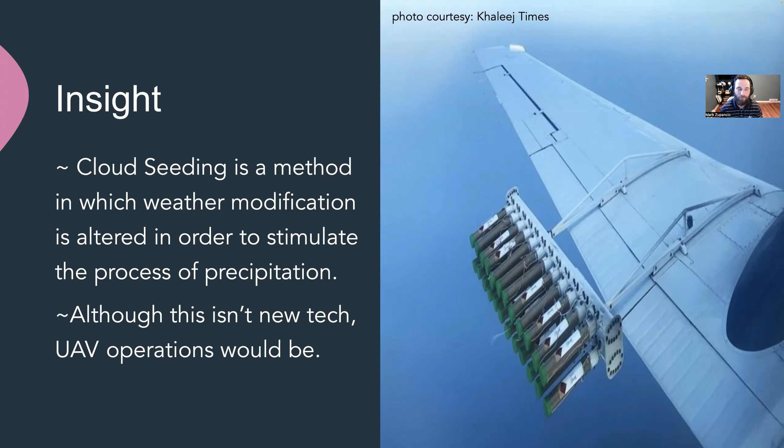Increasing weather instability has drastically reduced the water supply and forecasted weather in much of the United States and other regions. This erratic behavior will reduce growing seasons, complicate a variety of commercial services, and intensify wildfire scenarios. Global warming, along with erratic precipitation, poses a threat to agriculture, the environment, biomes, habitats, business, and human existence. The scale of detrimental disaster that this inhabits calls for a current solution to a global dilemma.

This leads into our problem context. Our proposed design focuses on addressing a solution where a swarm of drones will be dispatched to a problematic area. A respective sum of calculations will be formed by 3 different robots, utilizing a number of various sensors, gauges, and probes. An end result will be performed by a team swarm communicating with a central hub that results in the immediate and overall increase in precipitation.

Our customer base includes a variety of subcategories in the commercial and private sectors, ranging from local farming and agriculture, airports, ski resorts, and a number of various governing agencies, including the military. Our application area is mainly focused in these regions listed.

These are the design requirements as followed. Our swarm shall be designated into a cleared, required airspace. It shall be able to identify suitable weather systems in certain environments. The swarm shall be able to compute the necessary calculations in order to execute its mission. The drones shall finally be able to relocate to its designated landing zone.

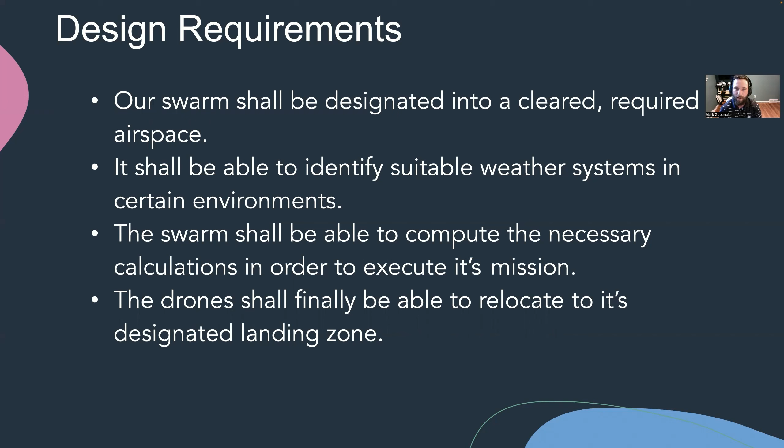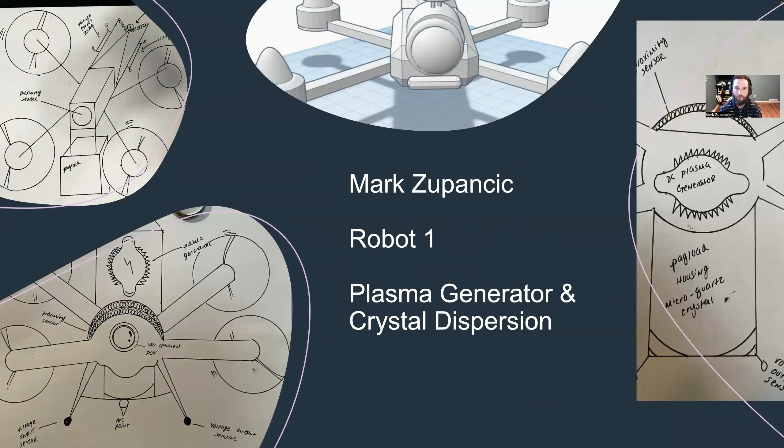My name is Mark Zupancic, and I will be presenting Robot 1, in charge of plasma and crystal dispersion. The first slide rendering the side angle of this CAD drawing features a sleek, aerodynamic, dual-body design of a quadcopter. On the anterior is where the logic is held, and the posterior is composed of the payload.

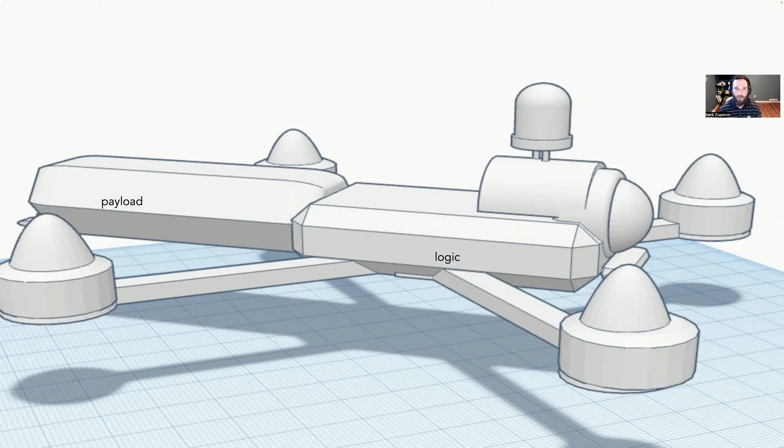The body composition will be designed using a carbon fiber shell, and the frame will be constructed from a titanium alloy. The next image shows an overhead view where the 4 DC motors are fixed to the frame.

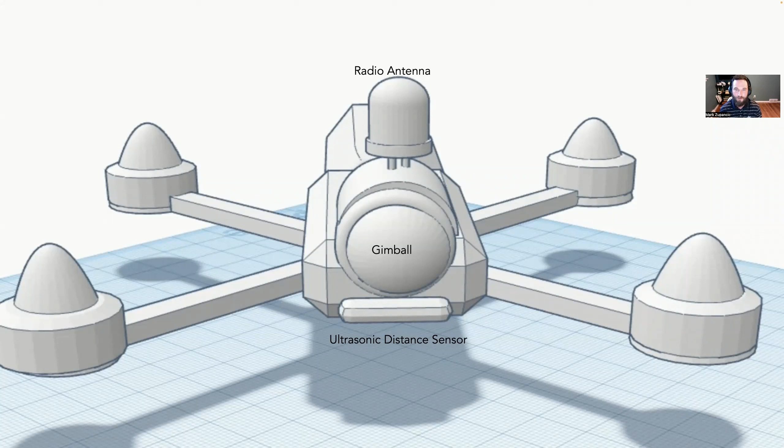Here, the ultrasonic distance sensor is located in the front for a 180-degree range of obstacle locations. A gimbal camera is also located here for usability. The dome on top is a radio antenna for unmanned control of this vehicle.

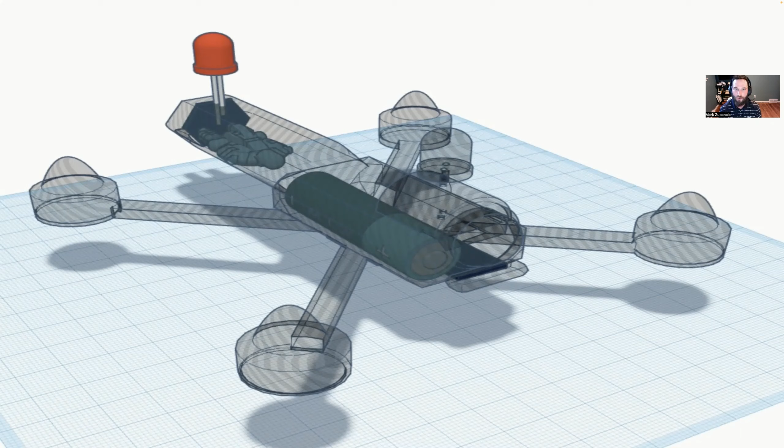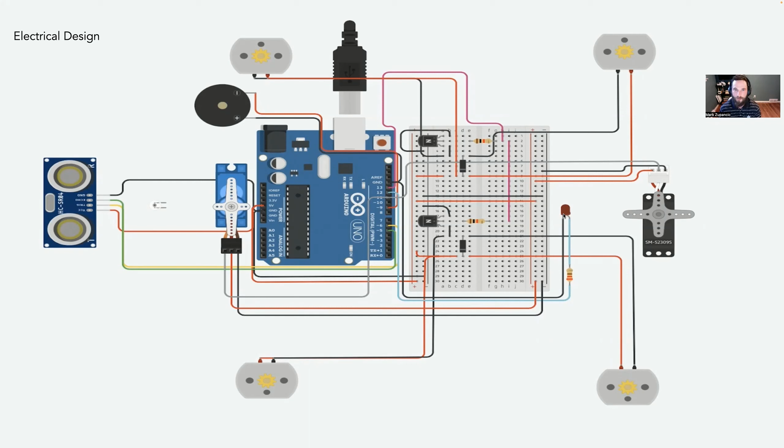As my flowchart provides in the next slide, once information is collected from the team swarm and hub, the unit powers on. I will run the simulation.

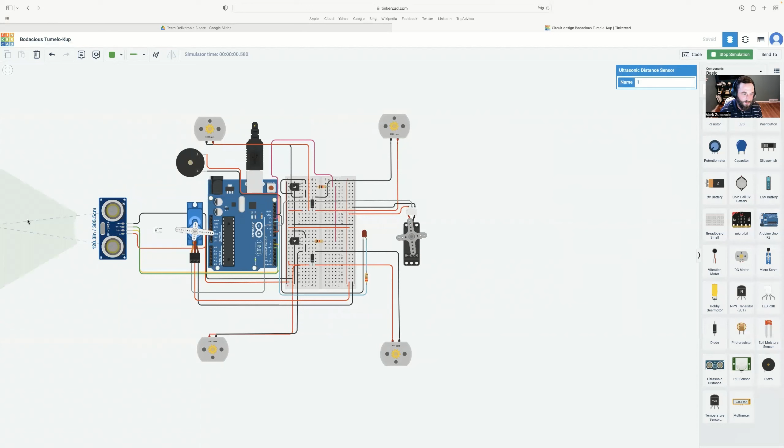I have my 4 DC motors here on the end. They'll be rotating at approximately 10,000 RPMs. My rear payload actuated door, in respect to my quadcopter, rotates from 0 to 180 degrees, kind of like a pepper grinder, so it will equally disperse its payload along a certain distance.

I have my LED here, which intermittently turns on and off to let air traffic control and other drones and planes know where I am, so they can visibly see me.

Here are the 2 NPN transistors. I have the 2 diodes, which will run the current one way - just all I need is to go up. I have my plasma generation right here. This will charge the particles released from the payload actuator.

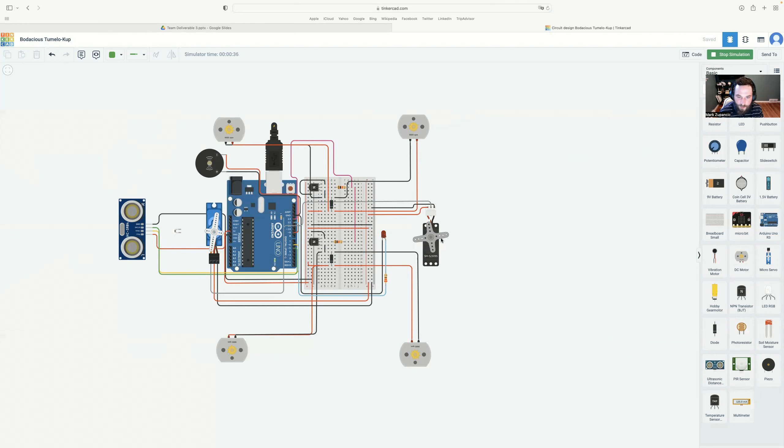Back here, and here's my software design listed. I will not go into much detail about that, but I will provide this at the end of the presentation. Thanks for watching.

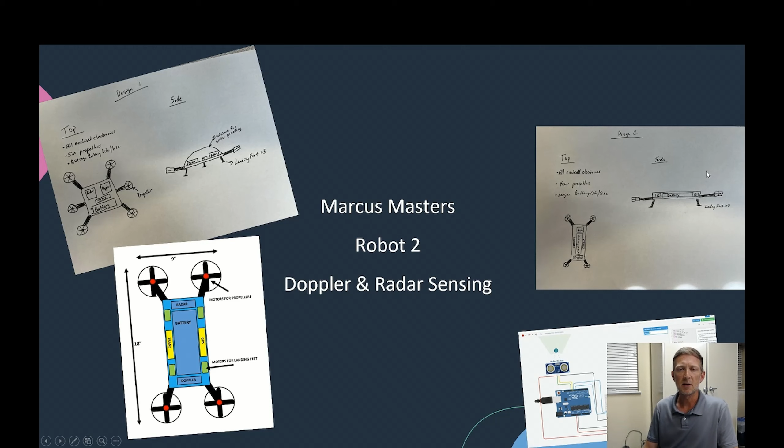My name is Marcus Masters, and I'm presenting the second robot in this group, the Doppler and radar sensing drone.

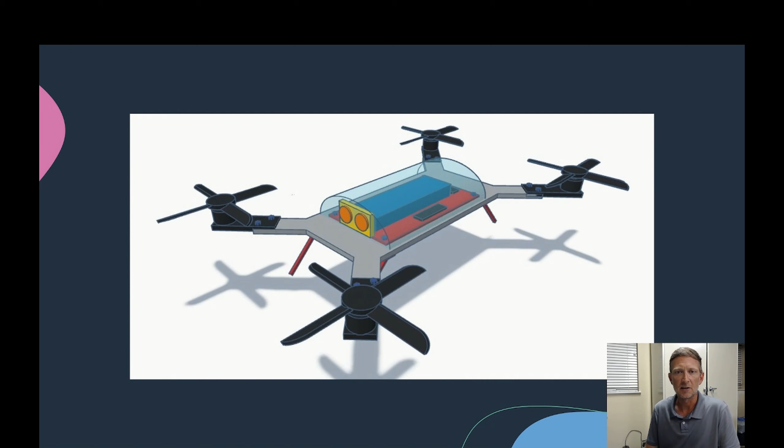Here's a broad overview of the drone itself. You can see that all electronics are enclosed to be protected from the weather and elements. The dimensions of my drone are 18 inches long by 12 inches wide.

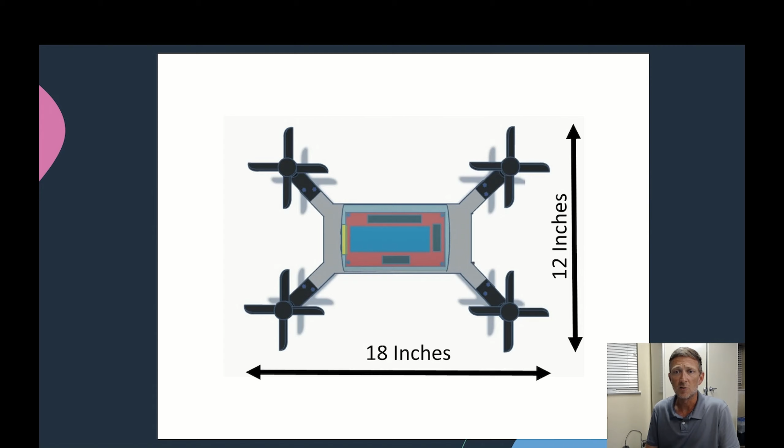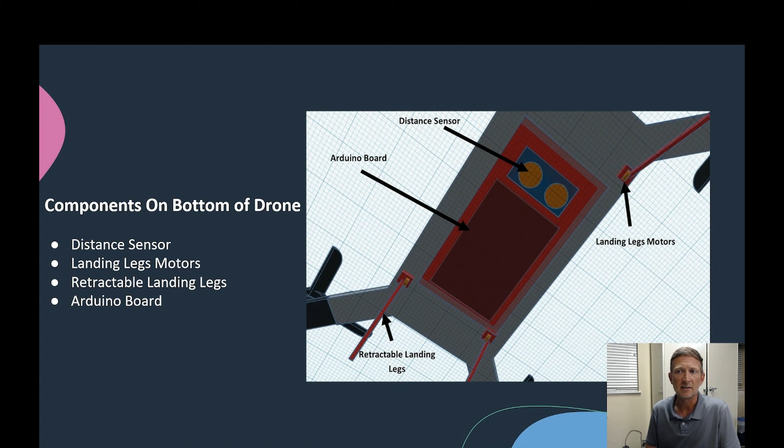The components on the bottom of the drone include the distance sensors, the Arduino board itself, retractable landing legs, and the motors that control the landing legs. The components on the top include the battery pack, communications boards, GPS board, the Doppler moisture sensor, and the ultrasonic distance sensor radar.

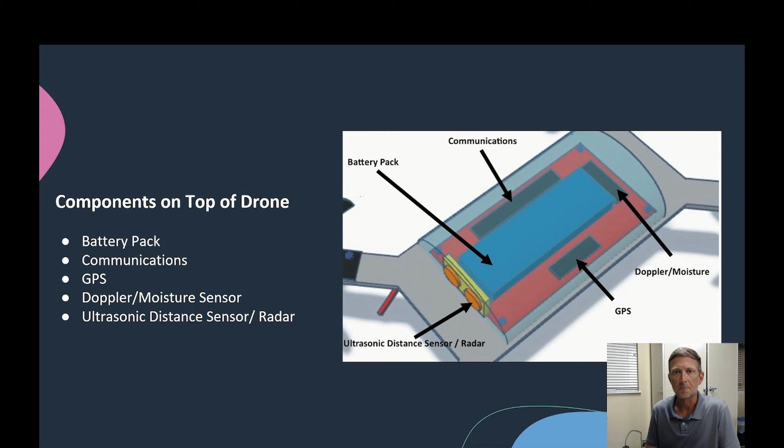If it fails that, it waits for a second, detects again. If it fails again, it communicates that back to the hub, and then the hub can decide if we need to pick a different area or what's going on.

If the radar does not detect any objects, it goes to the moisture sensor. If it has the desired levels, it will communicate to the hub and to the other drones to continue with the operation. Once the operation or objective is complete, the drone is programmed to maneuver back to the hub or home location.

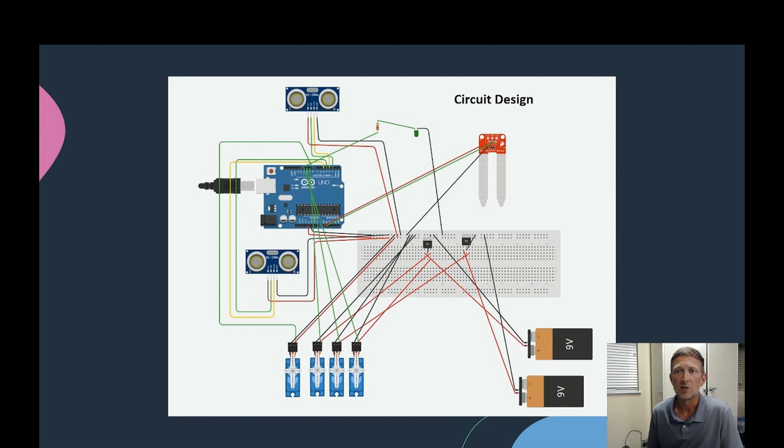The one on the bottom is for the servo motors. The one on the top detects if there is anything in the area. And then I also have a moisture sensor that once it hits certain levels of moisture will send a signal back that the levels are correct to proceed.

Here is some of the software coding that we have.

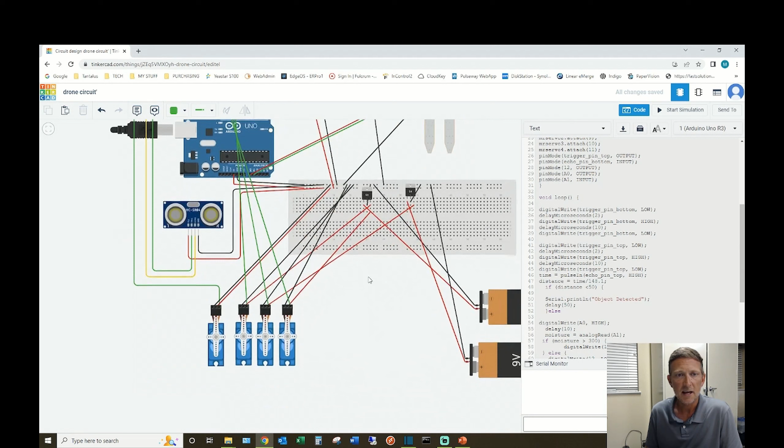Here is my design in Tinkercad. Start the simulation and we'll see that the servo motors are going to start moving - that's the legs retracting, based off this distance here, so it's far enough up in the air that the legs are going to retract.

This is the top sensor, and once this senses something in the area, it's going to report back to the main hub that an object has been detected. Get close enough - there we go, there's the report back to the main hub.

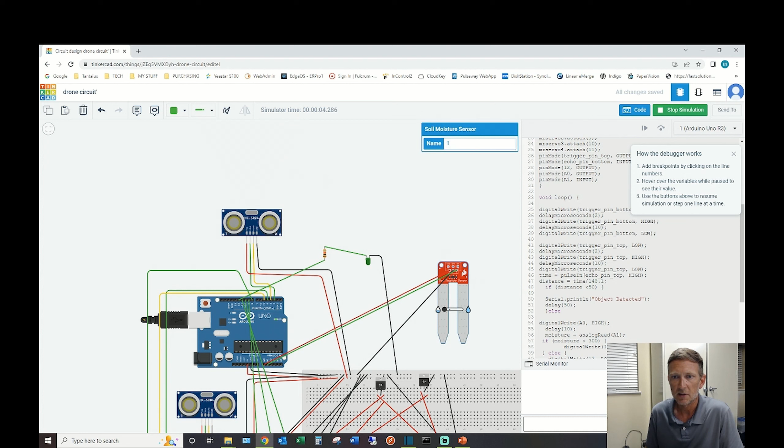Turn it back off. And then we also have the moisture sensor here. So once the levels of moisture get up high enough, and it reads that, it's going to make the green light go off, which is the message going back to the hub that the conditions are correct.

Up next is Jeffrey Hird, and he is doing the pressure and temperature robot.

Thanks, Mark and Marcus, for those great introductions and great slides representing your drones that will be part of our swarm team. I'm Jeff, part of Team 19 Gearheads, and I'll press on with cloud seeding based off of Mark and Marcus's great presentation. I'll jump right into it.

Here's my pressure and temperature sensing robot. There's the initial drawings sketched up and scanned in, and an example of how I hope my Arduino code would have turned out.

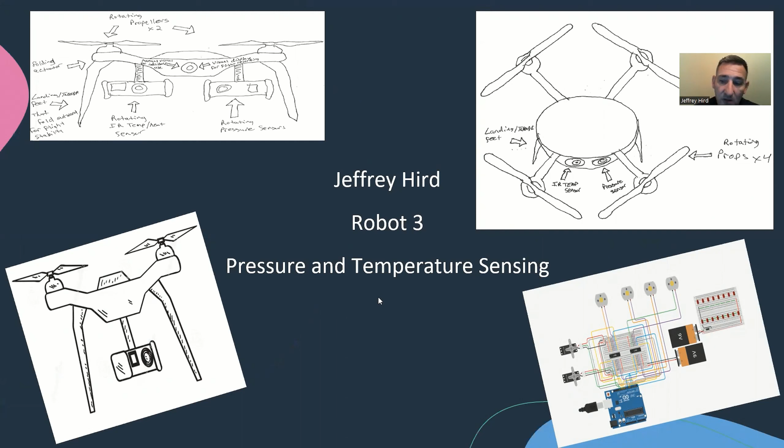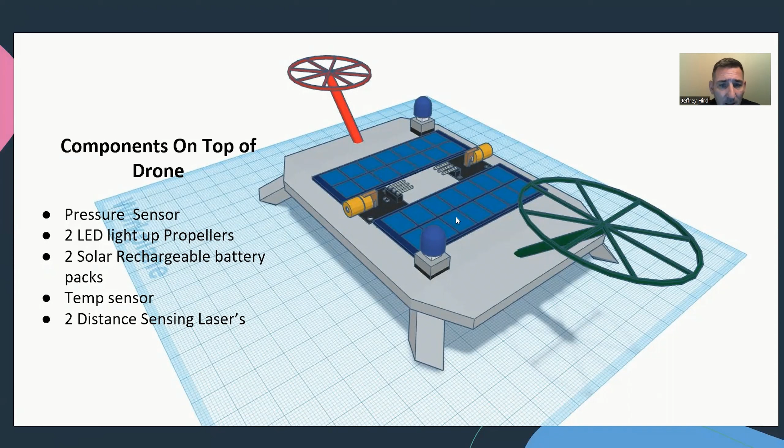So here's my design, basically shown on top here. The components are: I've got two propellers, one red and one green, kind of like lights on a fishing boat at night, so they light up in hours of darkness. I've got a couple solar powered rechargeable battery packs, and then my two sensors, one pressure and one temperature. I also added some distance sensing lasers so we don't run into anything or other drones while in the air.

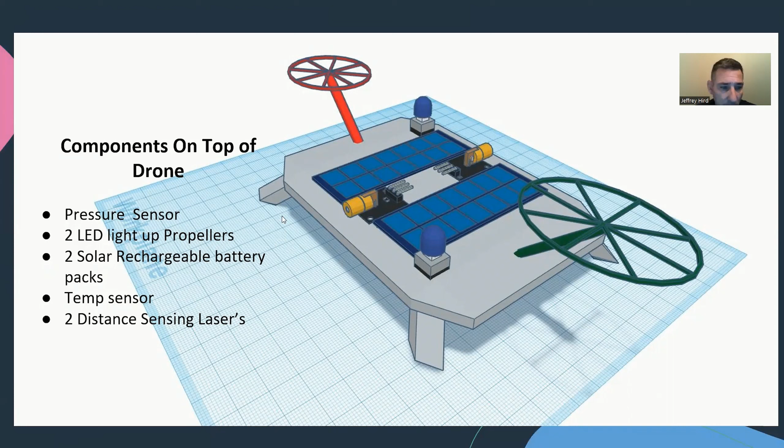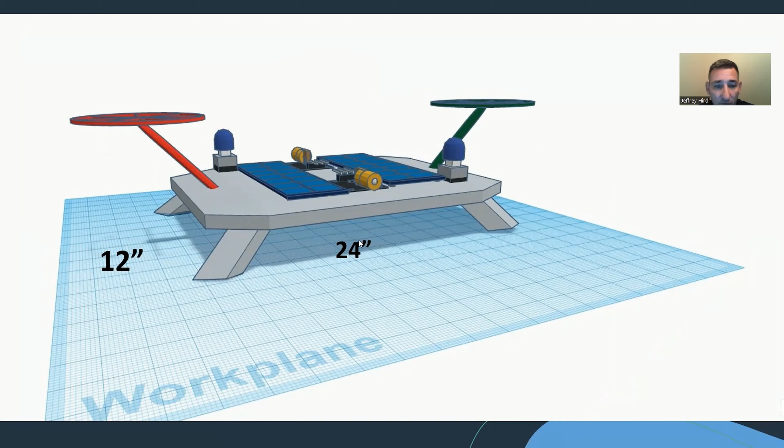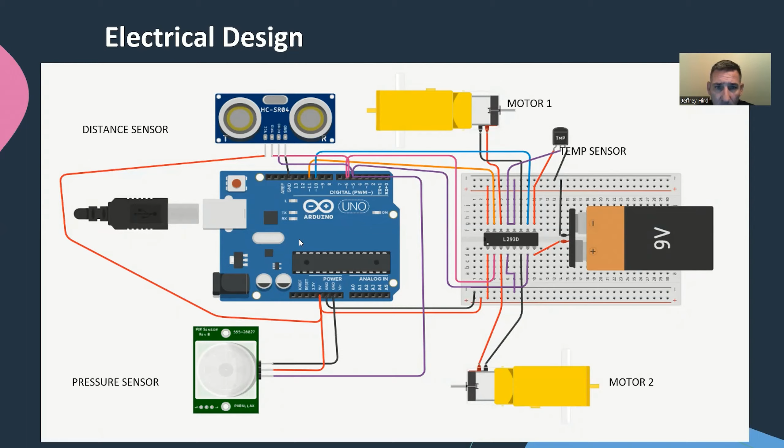And that'll be the temperature and pressure sensing robot. I'm Jeff. It's been a pleasure working with everyone.

Have a good night. Our next slide shows our robot collaboration flowchart.

The drones receive commands such as location and elevation from the central hub. They then proceed to the location and wait for all the drones to be in place. When the hub gives the command, drones begin to collect data and send it back to the central hub and the other drones. The radar and Doppler moisture drone will first make sure the area is clear of other objects and that moisture levels are appropriate.

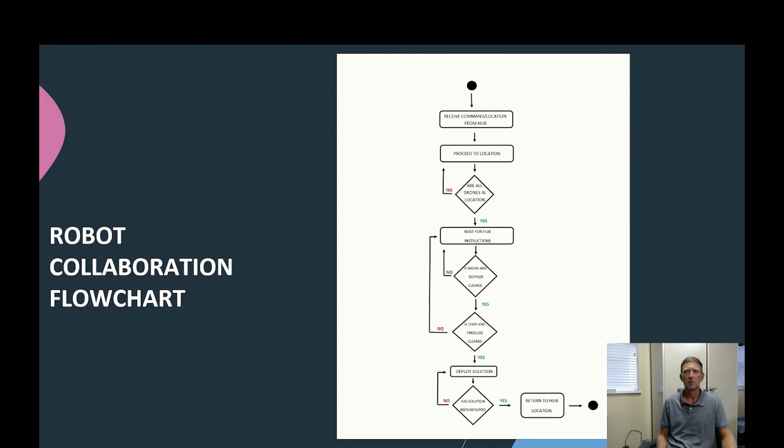In summary, climate change and increasing weather instability have devastated water supply levels, especially in the western United States. The agricultural industry in California alone lost over $1 billion in 2021. Cloud seeding is an innovative approach to help produce rainfall and much needed snowpack in these areas. Our technology is easily scalable, which makes it more cost effective than traditional methods.

We can easily add or reduce the number of drones and the amount of solution deployed. This new technology allows 3 different types of drones to work together to detect the best situation for cloud seeding. These drones use numerous sensors and real-time communications to pinpoint the exact location and time to produce more precipitation.

When they are finished, they will navigate back to the central hub for charging and for refilling of the cloud forming solution. Once they are charged, they'll be ready to be redeployed. Thank you for watching.